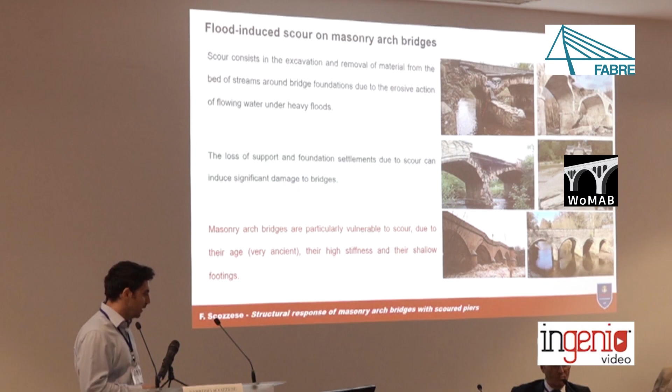I can also skip some slides because we already know what scour is and how insidious it can be for bridge safety, in particular for masonry arch bridges, which prove to be particularly sensitive and vulnerable to this phenomenon because of their age, their high stiffness, and their usually shallow footings.

What is the point? To date, a proper risk assessment procedure is not available for flood events. Unlike seismic hazard, for which we have well-established probabilistic frameworks like the PBEE, performance-based earthquake engineering framework, which is widely adopted even by practitioners, this is not the case when we talk about floods, so there is much work to be done.

A risk assessment procedure will be beneficial for a proper decision-making process. To date, most safety management systems base the decision, for instance, to close or not a bridge after a flood simply on the level of water reached at the bridge cross-section, compared to an event with a 200-year return period, for instance, which can be on the safety side or not. A physical reason behind this choice is lacking.

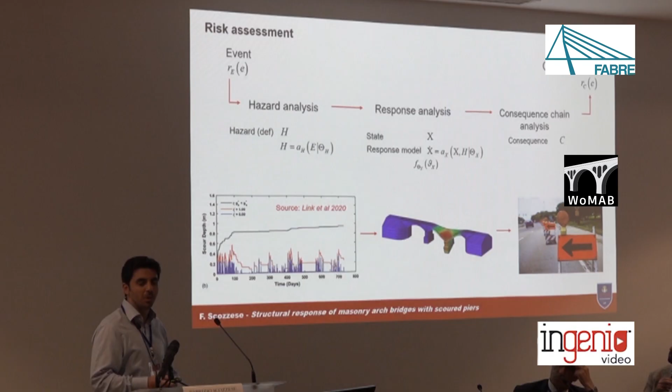So what we are doing here, for now, is working on this part of the framework, trying to provide a better understanding of the response of masonry arch bridges under scour. We try to identify some response parameters sensitive to scour and also easily monitorable, which can be used, for instance, within a probabilistic framework for the definition of fragility functions at a later stage, but also to guide the choice of proper monitoring strategies.

We approach this problem in a numerical way, also trying to characterize the most recurrent damage mechanisms and scenarios characterizing this type of bridge.

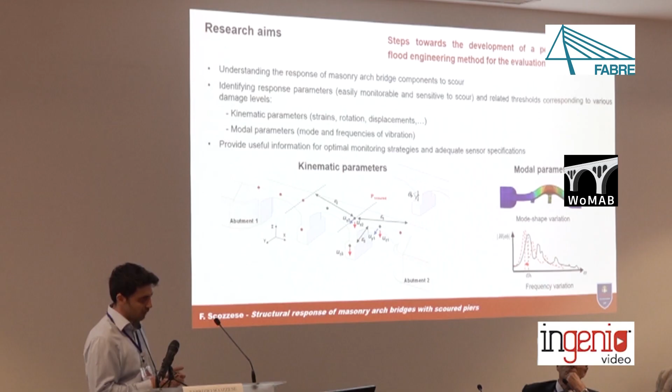We selected a case study representative of a wide set of bridges, of the same typology. We can see that there are quite common features, in particular geometrical features, among bridges in different countries, particularly in Europe, so we selected one which is quite representative of this typology.

We developed a numerical model in Abaqus, a continuous solid element model, in which, besides the nonlinear mechanical and geometrical nonlinearities, we also consider the possibility of separation between critical parts.

For instance, we provided some interface elements between the spandrel wall and backfill, between the spandrel wall and arches, and so on. So where we expect some separation, some nonlinear behavior, we modeled these interfaces.

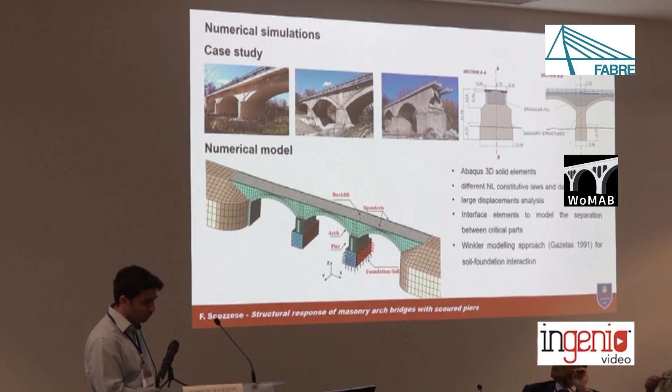Concerning the soil-foundation interaction, we adopted a simple Winkler modeling approach, as the one already presented by Enrico. We use elastic, compressive-only springs around the footings, and simulated the progression of scour by gradually removing the springs, assuming a scour shape.

This shape is an inverted pyramid with the vertex corresponding to the upstream face of the pier. This assumption is supported by literature, in particular some experimental results, and that's how we simulated the progression of the scour.

Concerning the scour parameters used for monitoring the process, there are two alternative metrics. One is the scour depth normalized by the height of the foundation. The other is the scour width underneath the foundation normalized by the total width of the foundation.

The latter is better because the response of these bridges is quite negligible as long as the scour depth is lower than or equal to the height of the foundation. So the system starts to respond only when we start excavating underneath the foundation.

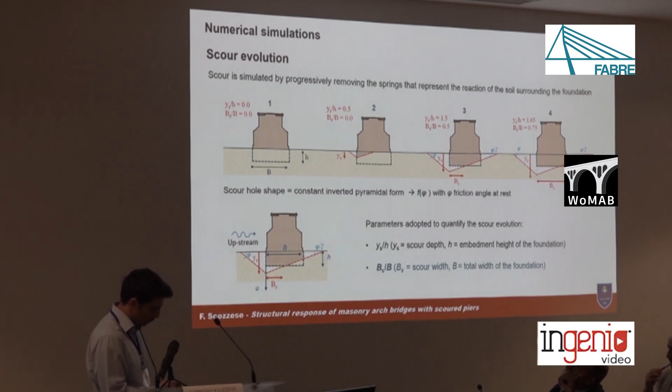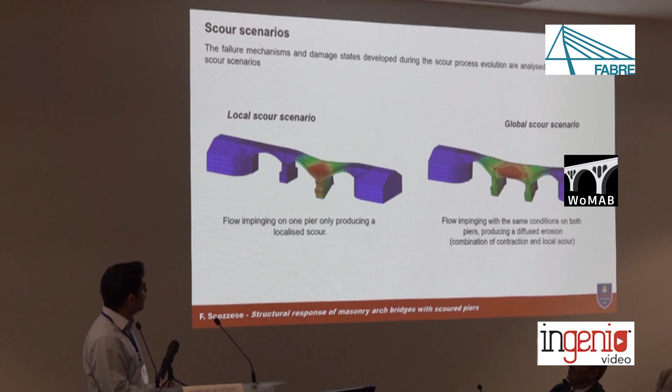With the aim of analyzing the failure mechanisms and identifying some damage states, we analyzed two different scour scenarios. One is local, where just one pier is assumed to be experiencing this phenomenon. The other, more ideal, we call global—it represents a combination of different sources of scour, not only local scour, corresponding to simultaneous development of scour underneath both piers.

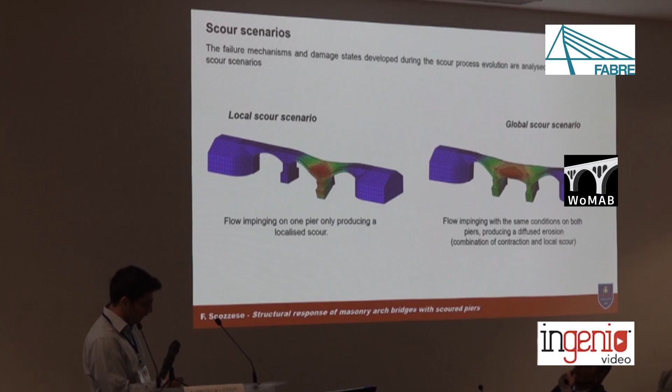Starting from the local scenario, if we analyze the response, here it is shown in terms of the vertical settlement of the basement at the upstream face, reported as a function of the scour in terms of the parameters I described before.

On the right, we can see some damage state developing on the bridge. In particular, when the scour is around 30% of the foundation, we start observing some plastic strain development on spandrel walls.

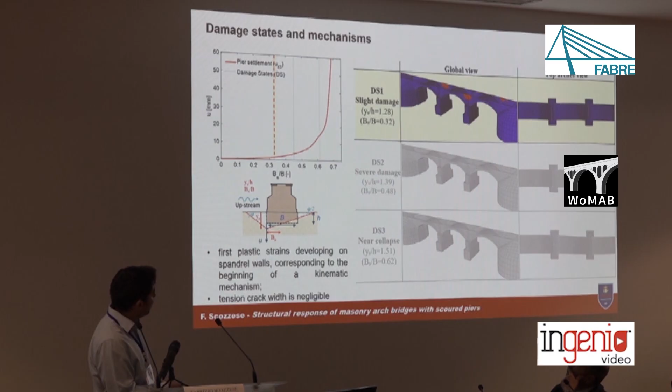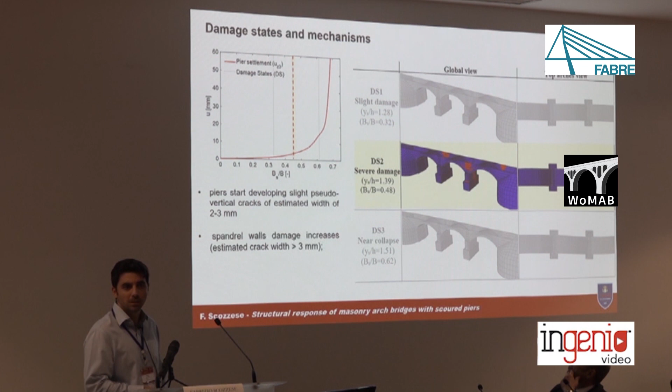This represents the first mechanism involved, and it represents the beginning of a kinematic mechanism of the bridge. Moving on with the scour, when we are around 50% of excavation, we also observe some pseudo-vertical crack development on piers and in the foundation. At a later stage, around 60% of excavation, we attain this near collapse condition where typical diagonal cracks develop on arches.

This represents a near collapse condition, after which the response suddenly rises for very, very small increments of the scour.

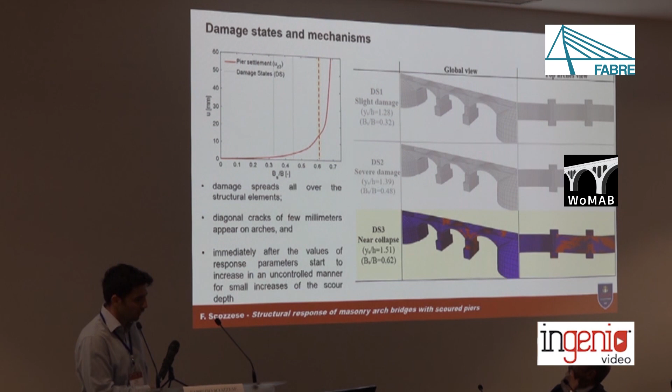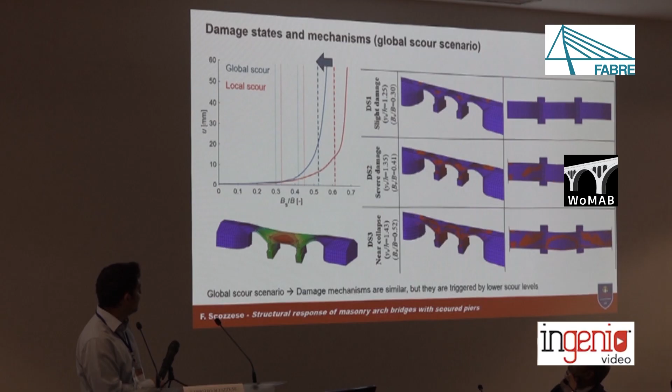Similar reasoning can be made analyzing the global scenario. The mechanisms are similar, not equal, but the important thing to observe is that the whole response is shifted to the left, meaning that lower levels of scour are needed in a global scenario in order to activate these mechanisms.

Comparing these results from local and global scenarios, we can observe that this 30% excavation underneath the pier represents the level of scour which triggered the first mechanism.

Higher levels of scour are required to lead the system to collapse, from 50 to 60%. This seems quite high, and it might be surprising to see such high values of scour, but this is also observed in reality, where if we look at the post-failure condition of some really collapsed bridges, we often observe a really high level of excavation underneath the pier. So this is a witness of the robustness of the system, let's say.

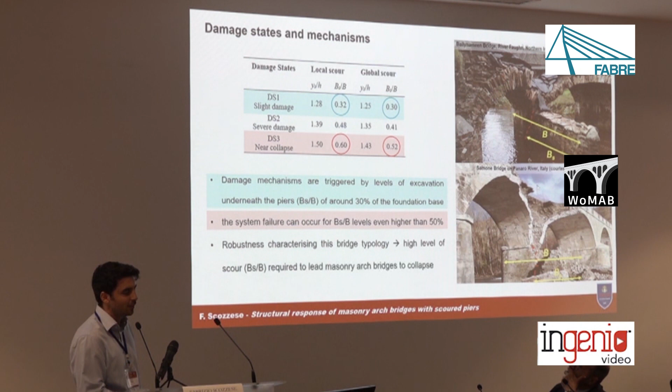So, among the sensitive parameters, some which are easily monitorable and can be used even in long-term monitoring are the transverse displacement at the top pier level, or the diagonal relative strains at the deck level, or rotations. These are sensitive parameters.

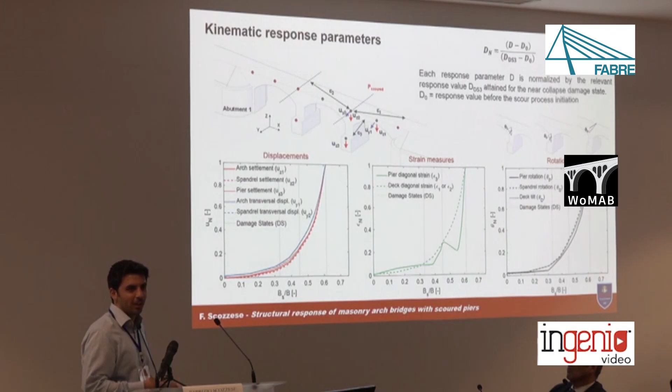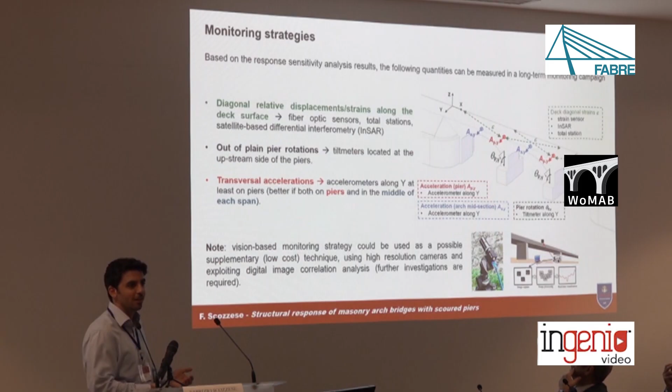Why not investigate vision-based monitoring strategies? Using low-cost, high-resolution cameras in order to reconstruct the displacement time history at different structural points can be, as I say, the low-cost strategy. We have to check if we have the resolution for doing that.

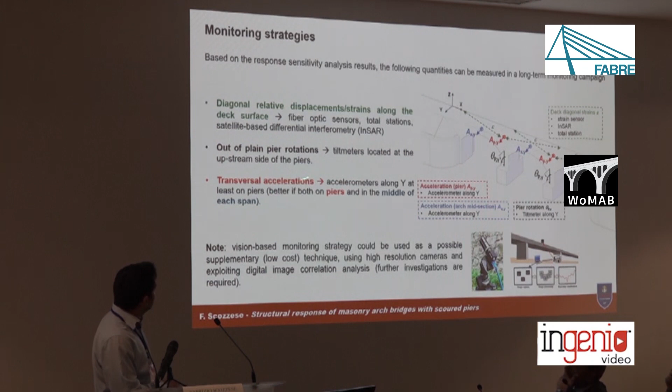Accelerometers are of course useful, even though there are some critical aspects already highlighted by Enrico. When we talk about vibration-based monitoring, what we observe is that the frequency variation due to scour evolution is actually negligible, as long as the scour is lower than the depth of the foundation.

On the other hand, we have some higher sensitivity in terms of mode shapes, meaning that even before the total excavation of the depth of the foundation, we start observing some significant modification on the transverse mode. Now, this is the result of a numerical investigation - of course reality is quite different, there is noise, there are other problems to be considered, but there is the possibility to use this strategy.

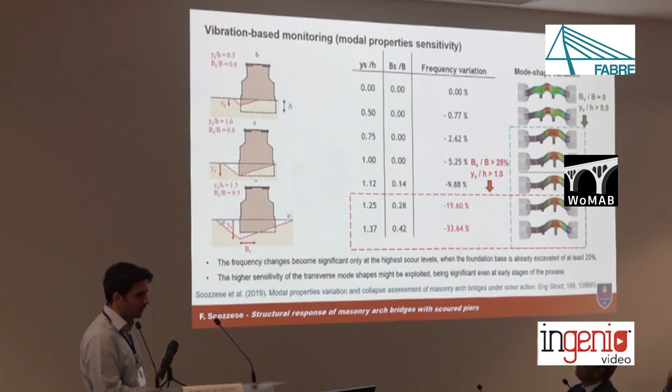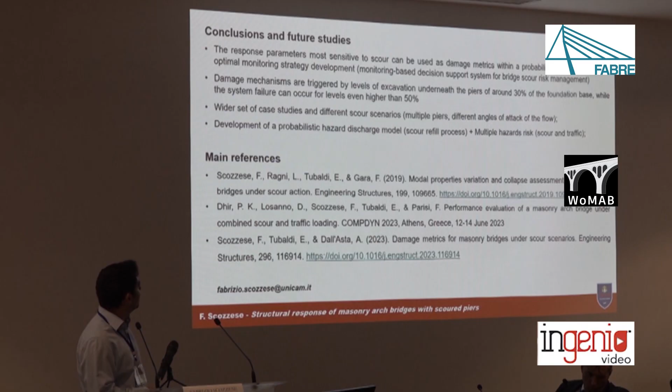In conclusion, there are several open issues on this topic, so we are working on it, and we have to extend our analysis to a wider set of case studies in order to validate these results. We can also consider different scour scenarios, different angles of attack of the flow, and it would be useful to have a probabilistic hazard discharge model to be used in a risk assessment procedure, a model which is also able to consider the refill process after flood events.

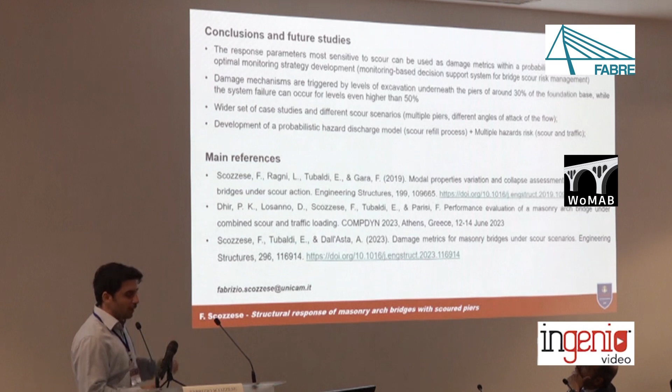So there are different aspects on which we should work. It's an ongoing activity, and that's it. Thanks for your attention.